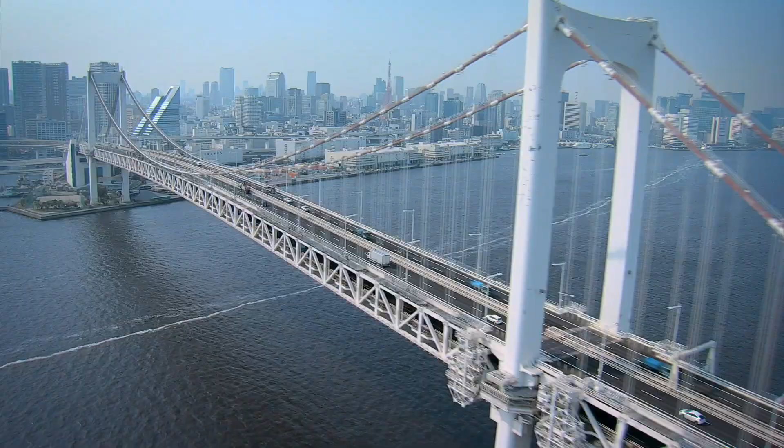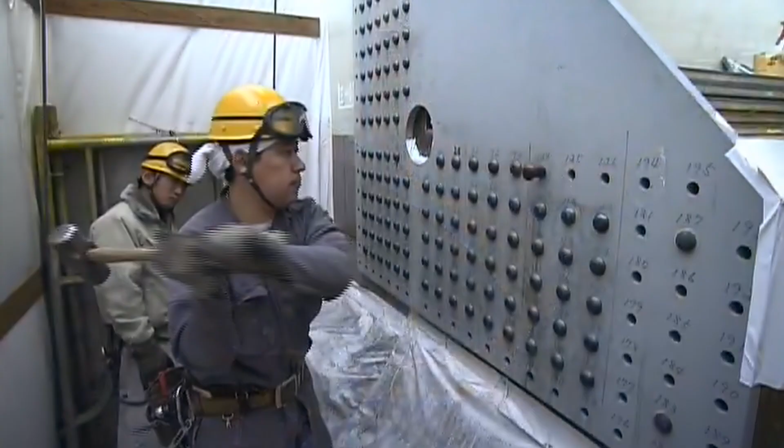Expressways support daily lives in the capital. 1 million vehicles flow in a day. The Metropolitan Expressway is a main transport network for the capital. The people maintaining the expressway every day are engineering staff.

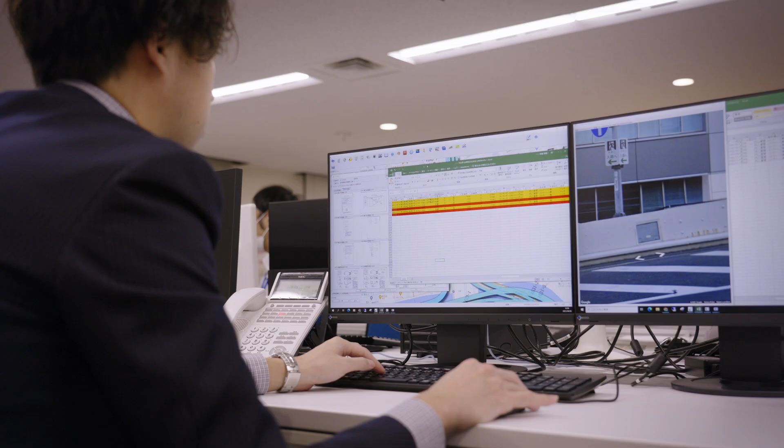However, there is one more location that helps with the maintenance of the expressway. Take a look at this normal-looking office. This is the computer system the staff use. On these computers, you can see the expansive network of the expressway.

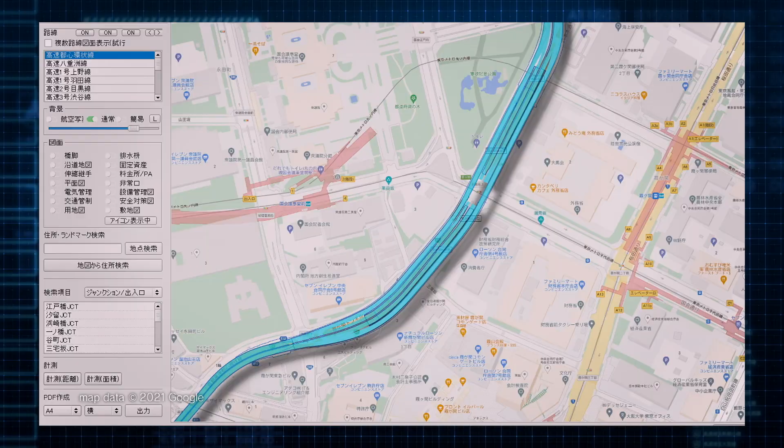The system that makes this possible is called iDREAMs. It offers functions helpful to anybody working in infrastructure. With just a click of the map, information regarding damage, among others, is easily accessible. The system contains all information that is required for maintenance work.

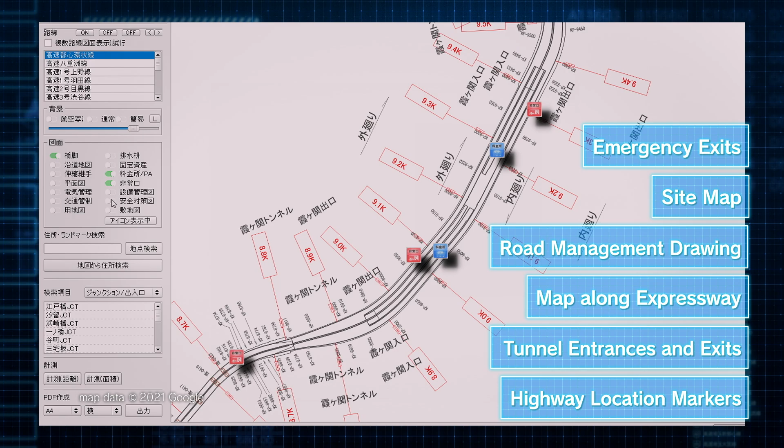Let's have the engineering staff show us how this system actually works. Expressway maintenance requires inspection, diagnostics, repairs, reinforcement, and records. Maintaining this cycle is vital. Each process uses the iDREAMs system. Let's look at how iDREAMs is used for inspection. Mr. Kaneko will be telling us all about it.

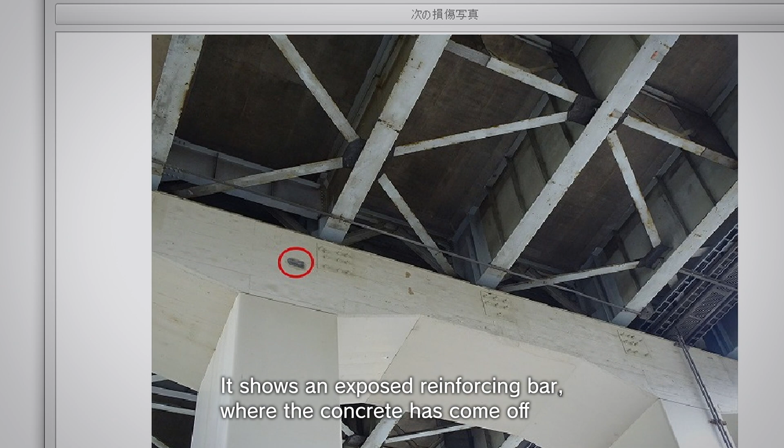Before he goes to carry out inspections, he can first learn the history of the location. iDREAMs can help through the completion drawing and the register search function. The Metropolitan Expressway network has served the city over 60 years. The total length of the network now is 327 kilometers.

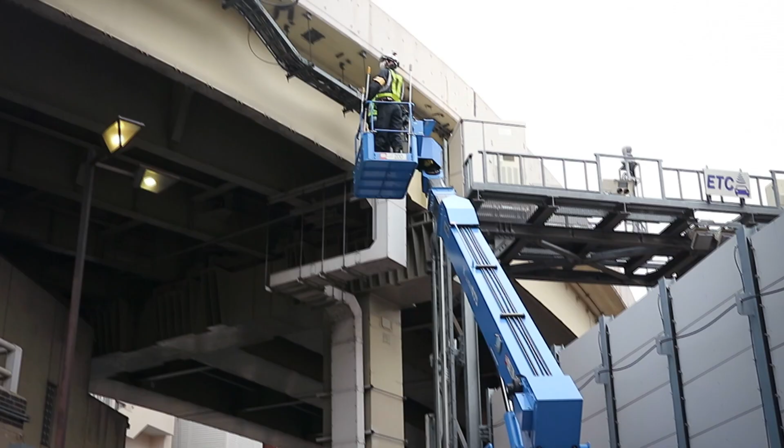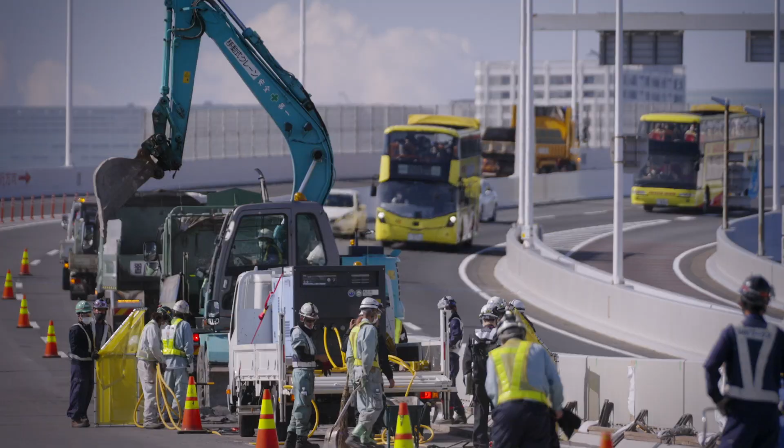30,000 incidents of damage are found every year. When and by whom was it constructed and maintained? Knowing the history of the infrastructure is very important.

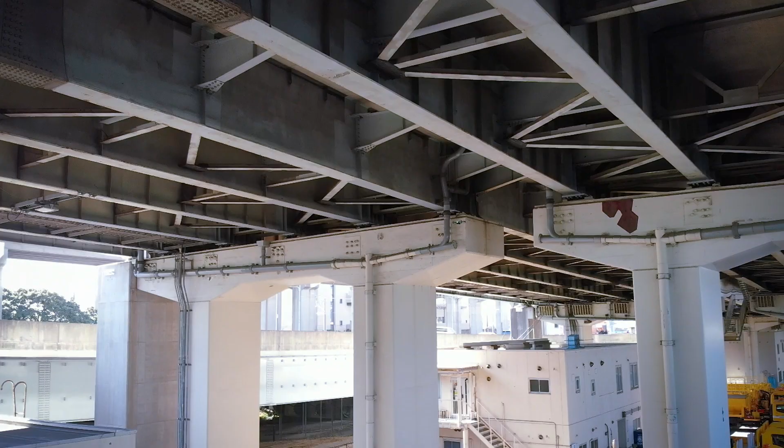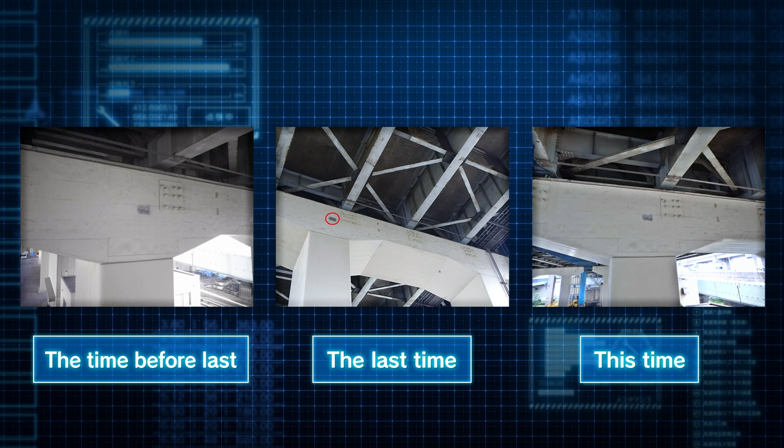By comparing the current status with past damage, the workers can see the changes over a period of time. This also prevents oversights during inspection. After inspection, the data in the tablet can be uploaded and converted to report format.

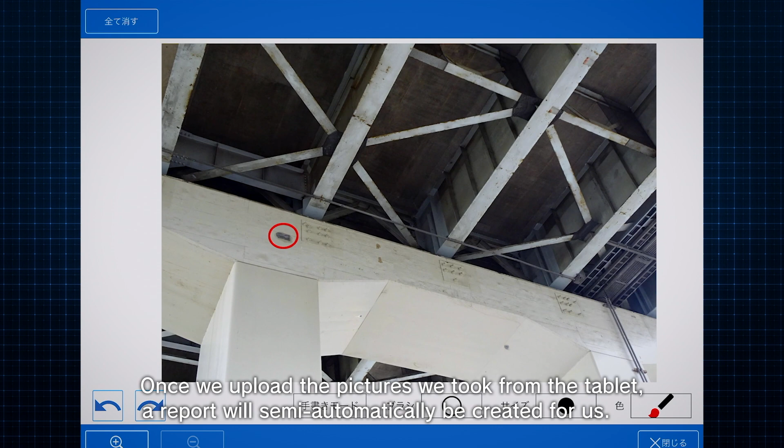The simplicity of this system makes it easy for everyone. Inspections and repairs are always happening on the Metropolitan Expressway. iDREAMs is great because information can be recorded in real time and used immediately. So who operates and manages this data? It's the Shutoko Technology Center.

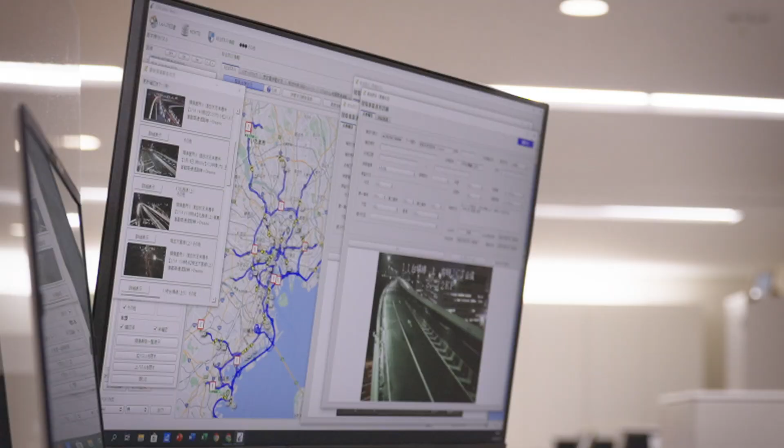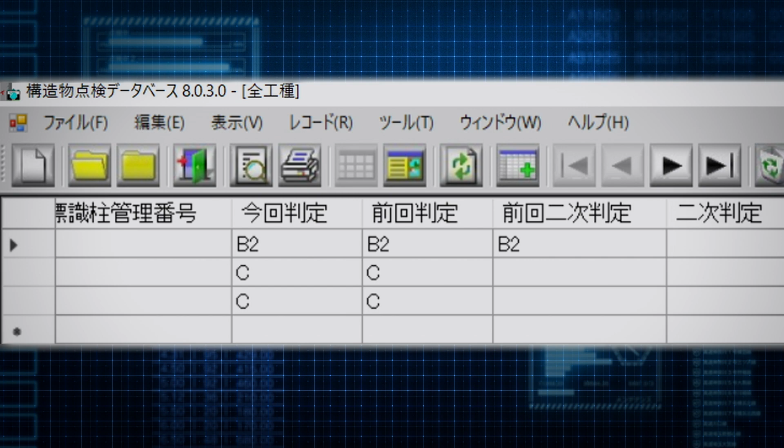This makes iDREAMs a database for continuous on-site management. The next step is repairs and reinforcement. iDREAMs is useful for this process as well. For example, it helps create repair plans.

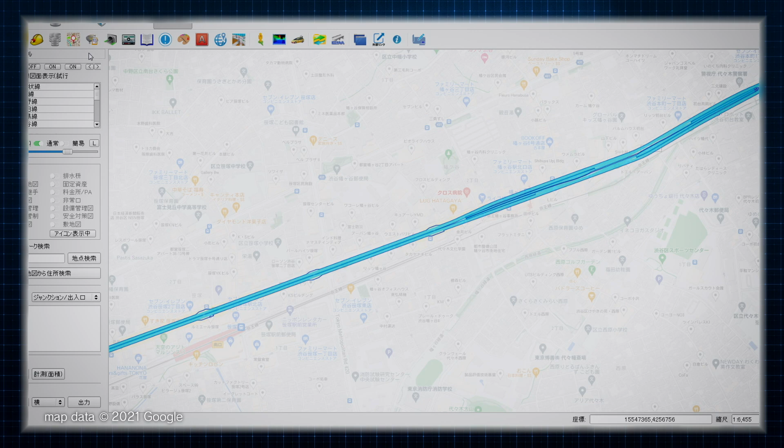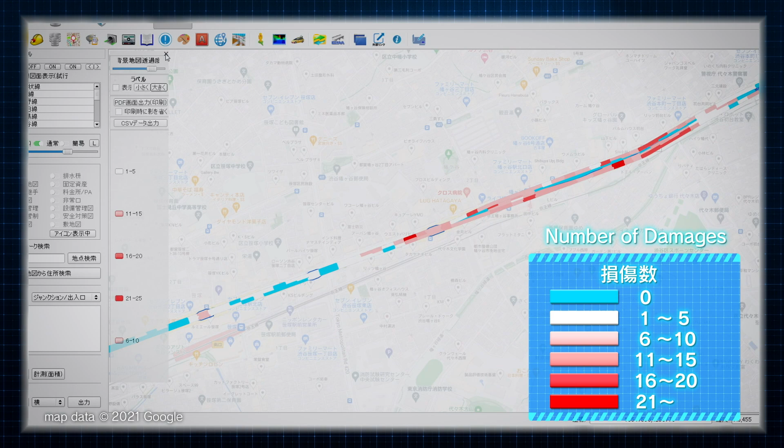Let's look at the concrete damage for the route number 4 Shinjuku line. The inspection data shows the number of damages for the entire line and ranks them by color. Workers can visualize the extent of repairs that are necessary and the priority for those repairs. It also helps for planning.

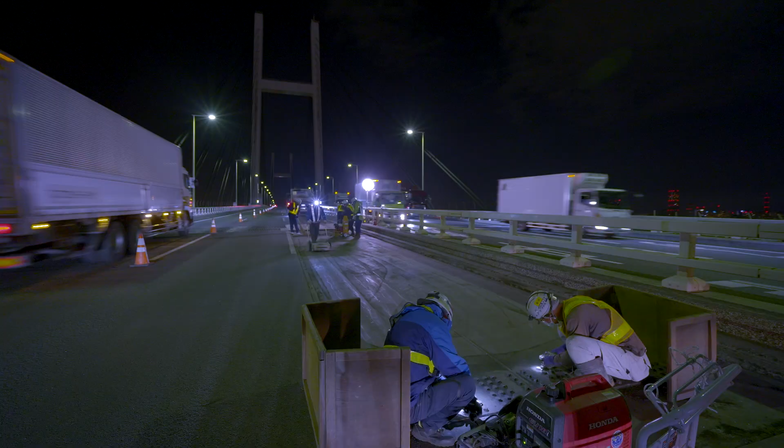After planning, on-site work begins. However, the Metropolitan Expressway rarely sleeps. Vehicles pass by even at night. Without closing the expressway, they do repair work safely. The iDREAMs system also finds its place during the process.

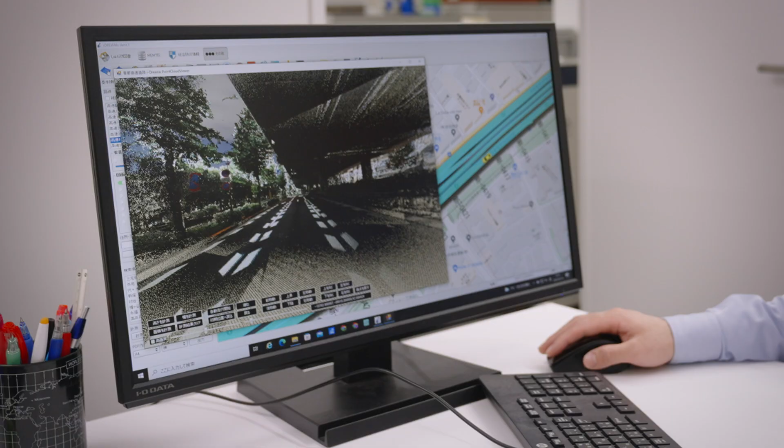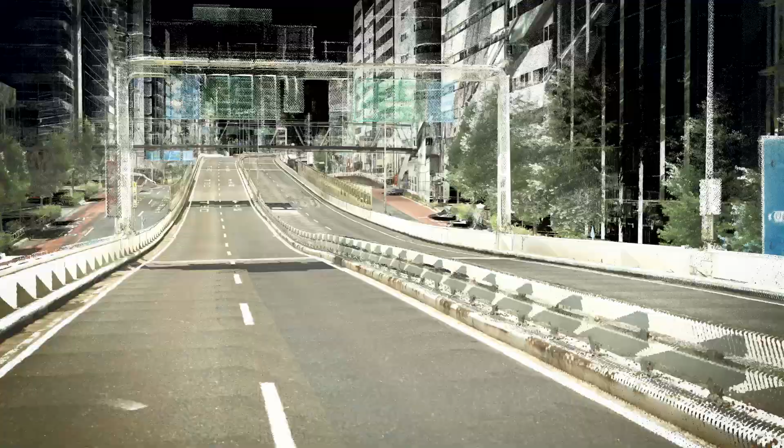Point cloud data is a collection of point data that has three-dimensional XYZ coordinates. The data is collected via laser beams on the expressway. It's highly accurate, with 1 million beams per second. iDREAMs has a model of the Metropolitan Expressway created by this data. The system also has data of nearby buildings replicated on the computer here.

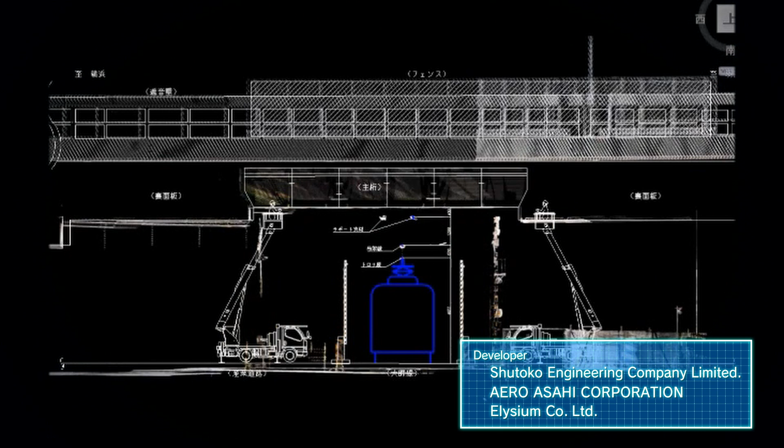They are checking the amount of space between railway infrastructure and the aerial work platform. A thorough analysis via iDREAMs allows meetings to be efficient and fruitful for all parties. Repair works can be done safely.

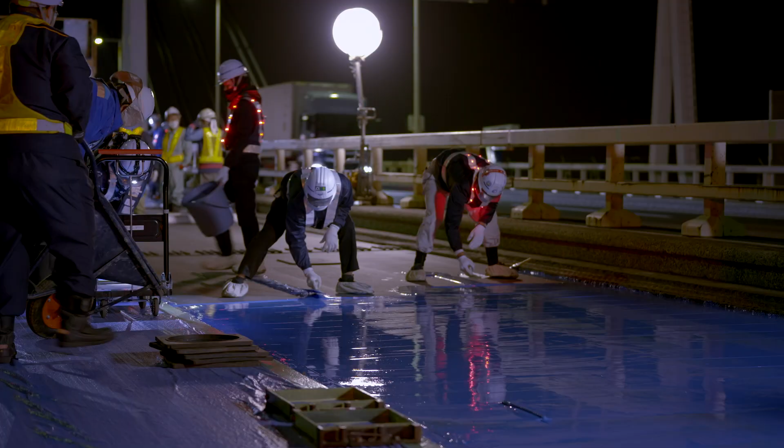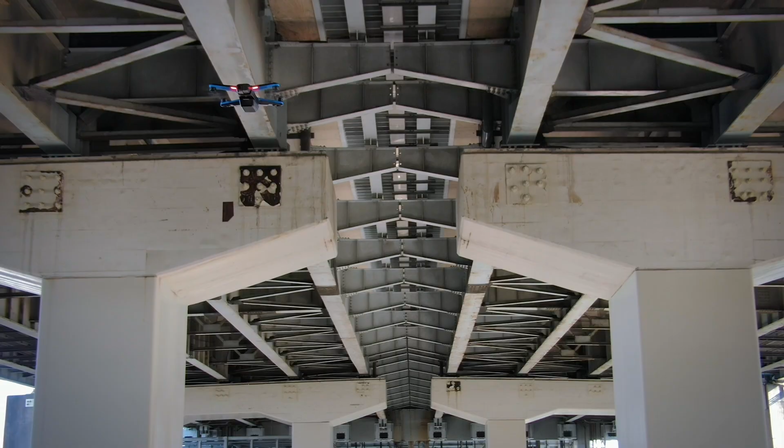The Metropolitan Expressway continues to service the city with its large network. Maintenance methods also continue to evolve. They're starting to try new things, such as using drones for inspection. Both expressway and infrastructure management will continue to progress toward the future.